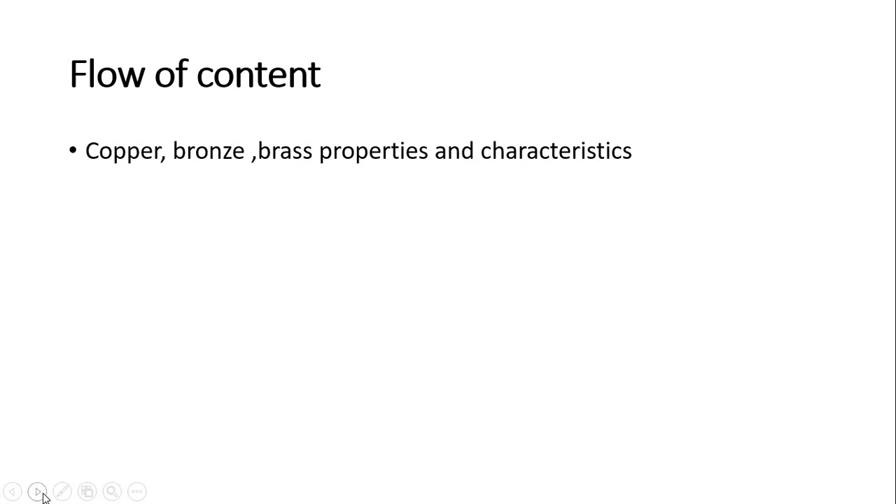In this video, we will discuss our chapter number 1 and the topic is characteristics of copper, bronze, brass. Now, introduction. Copper, brass and bronze are part of a category of metals known as red metals, which are characterized by their reddish tint. While copper is a pure metal, brass and bronze are copper alloys. Brass is a combination of copper and zinc, bronze is a combination of copper and tin.

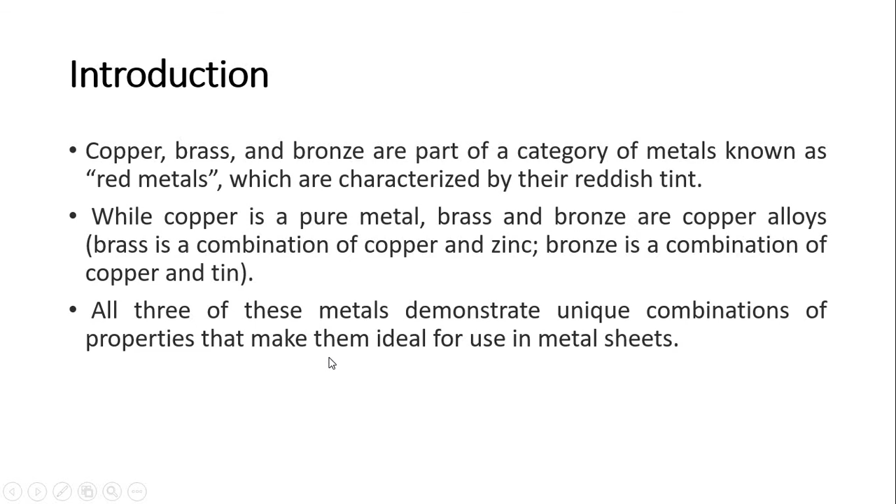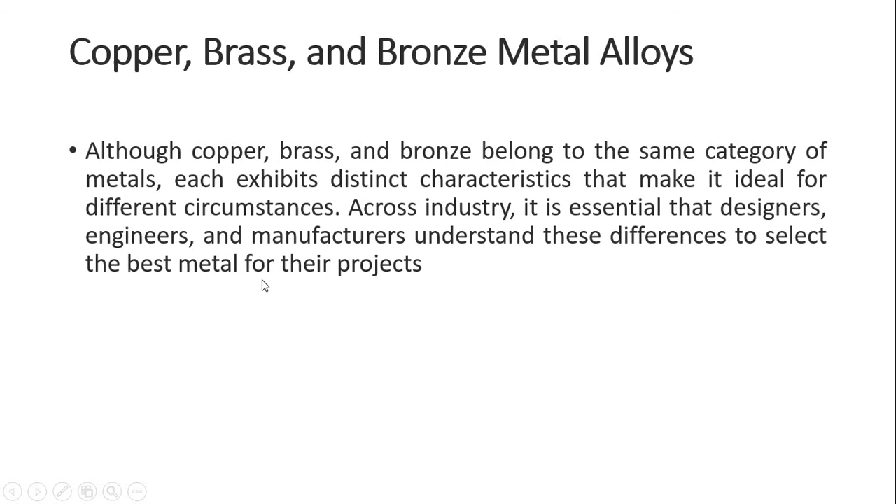All three of these metals demonstrate a unique combination of properties that make them ideal for use in metal sheets. Although copper, brass and bronze belong to the same category of metals, each exhibits distinct characteristics that make it ideal for different circumstances. Across the industry, it is essential that designers, engineers and manufacturers understand these differences to select the best metal for their projects. What is copper?

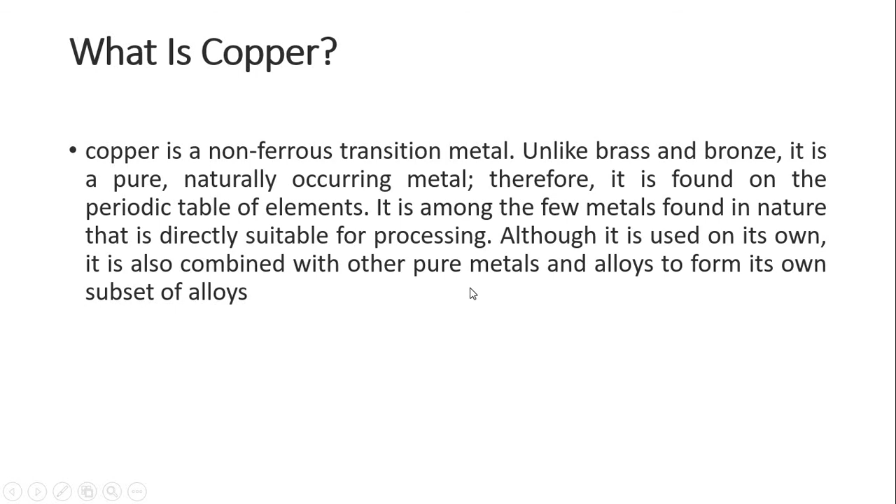Copper is a non-ferrous transition metal. Unlike brass and bronze, it is a pure, naturally occurring metal. Therefore, it is found on the periodic table of the elements. It is among the few metals found in nature that is directly suitable for processing. Although it is used on its own, it is also combined with other pure metals and alloys to form its own subset of alloys.

Properties of copper. Copper has several properties that make it ideal for construction and manufacturing. Copper demonstrates excellent thermal and electrical conductivity, making it suitable for use in electronic and electrical systems and thermal equipment. It exhibits resistance to many forms of damage, including impact, wear and corrosion. Additionally, it maintains its strength when flexed, formed and drawn.

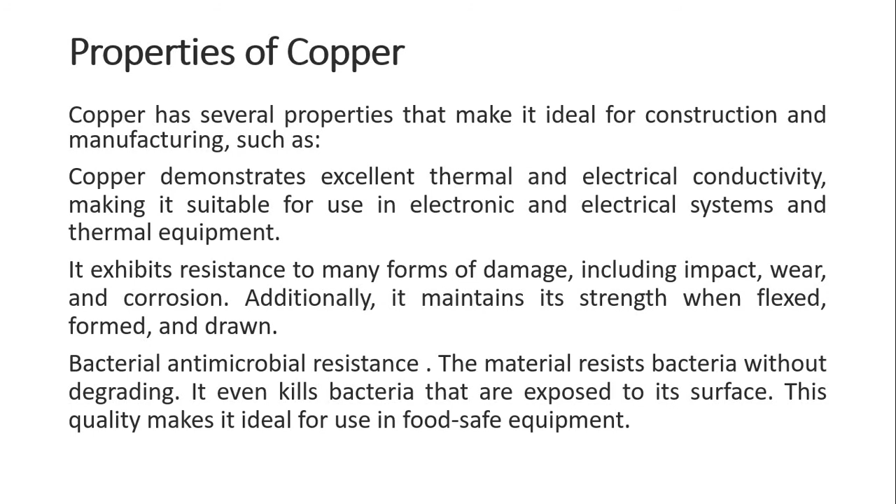Bacterial antimicrobial resistance. The material resists bacteria without degrading. It even kills bacteria that are exposed to its surface. This quality makes it ideal for use in food safe equipment. Now, available grades of copper. Copper is available in many different grades, and according to their grade and properties they are used in various applications. Alloy 101, alloy 110, alloy 122 and alloy 145 are available in rod and bar, and all these alloys have different properties.

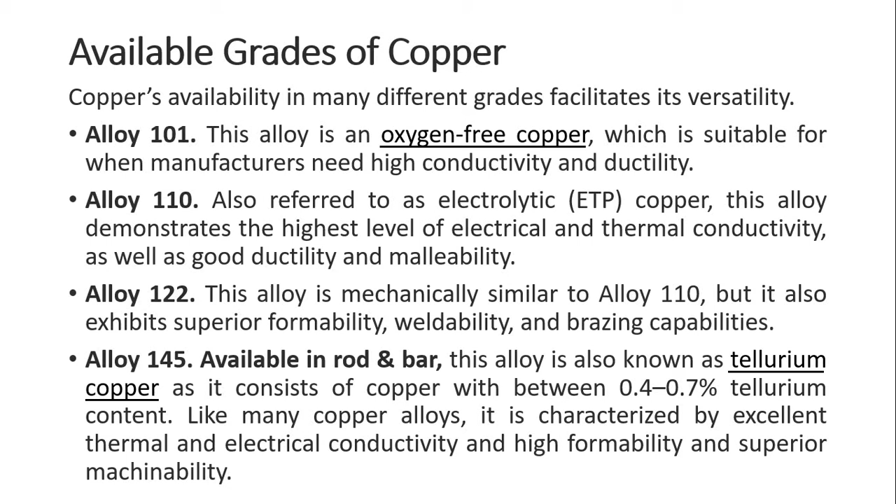Now, application of copper metal sheets and shapes. In general, copper offers excellent conductivity, formability and machinability. These qualities make copper metal sheets suitable for a wide range of industrial applications, including use as architectural construction, plumbing and heat exchanger materials and components. Additionally, its high ductility allows sheet to be drawn into wires for electrical systems.

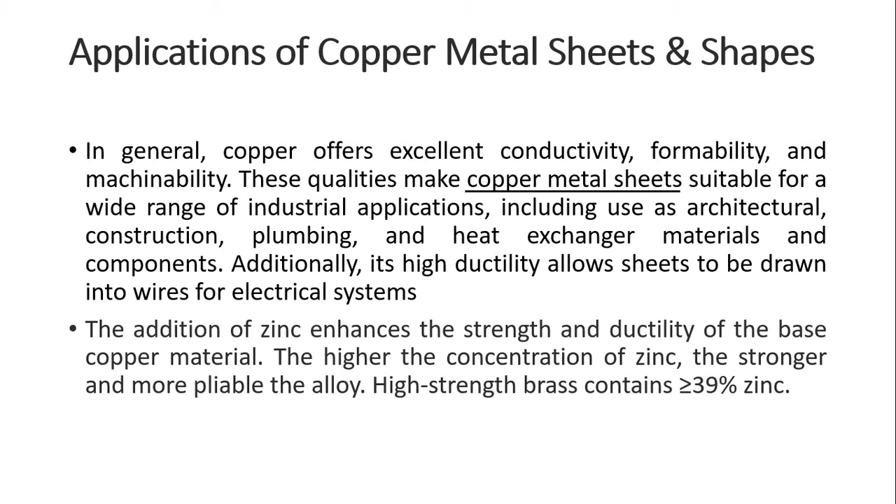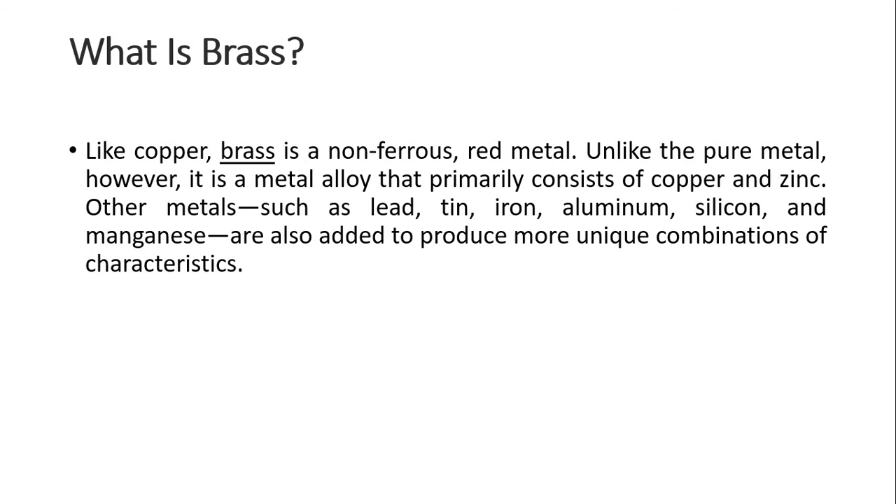The addition of zinc enhances the strength and ductility of the base copper material. The higher the concentration of zinc, the stronger and more pliable the alloy. High strength brass contains greater than or equal to 39% zinc. What is brass? Like copper, brass is a non-ferrous red metal. Unlike a pure metal, however, it is a metal alloy that primarily consists of copper and zinc. Other metals such as lead, tin, iron, aluminium, silicon and manganese are also added to produce more unique combinations of characteristics in brass.

Now, properties of brass. As a copper alloy, brass demonstrates many of the characteristic properties of copper. However, the alloy does exhibit a few distinct properties compared to pure copper and other copper alloys. For example, susceptibility to stress cracking, malleability and formability, low melting point, and non-ferromagnetism. Susceptibility to stress cracking: as brass is stronger and stiffer than pure copper, it is more susceptible to developing stress cracks. Malleability and formability: compared to bronze, brass is more malleable. Additionally, it is easy to cast or work.

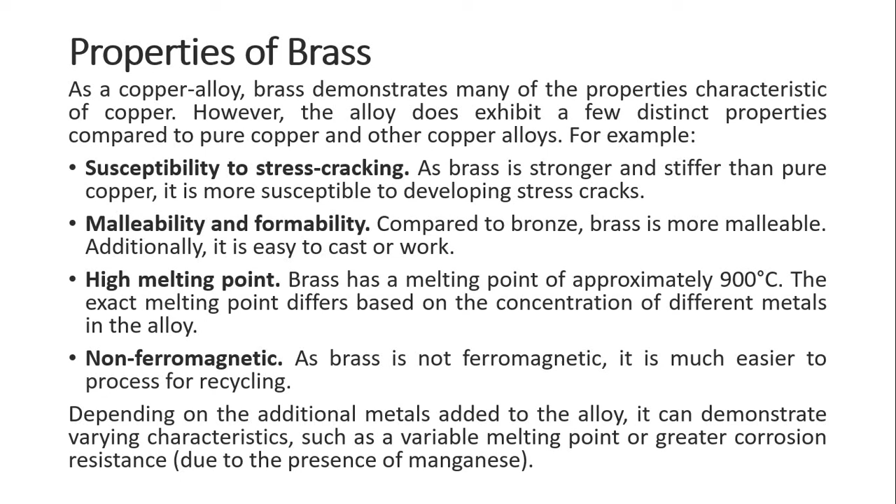High melting point. Brass has a melting point of approximately 900 degrees centigrade. The exact melting point differs based on the concentration of different metals in the alloy. Non-ferromagnetic. As brass is non-ferromagnetic, it is much easier to process for recycling. Depending on the additional metals added to the alloy, it can demonstrate varying characteristics such as a variable melting point or greater corrosion resistance due to the presence of manganese.

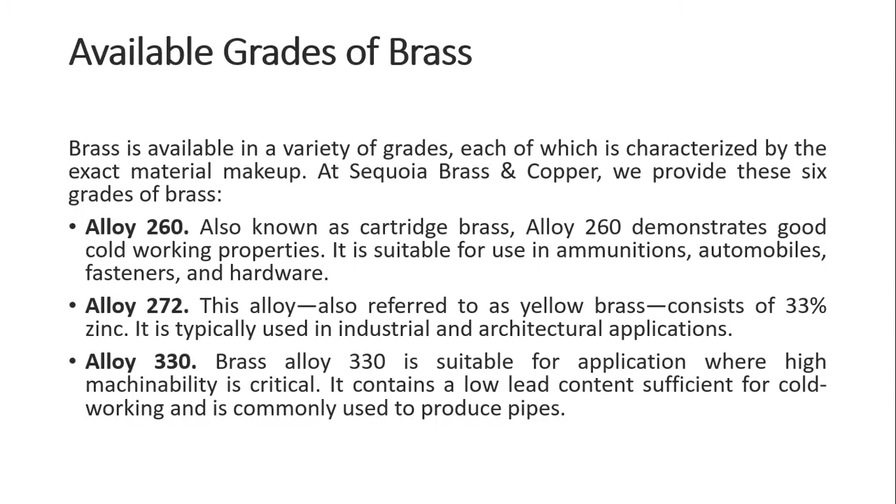Available grades of brass. Brass is available in a variety of grades, each of which is characterized by its exact material makeup, at Sequoia Brass and Copper. Alloy 260, alloy 272 and alloy 330 are available grades of brass, and these are the different alloys of brass. Application of brass alloy: brass metal has several different applications.

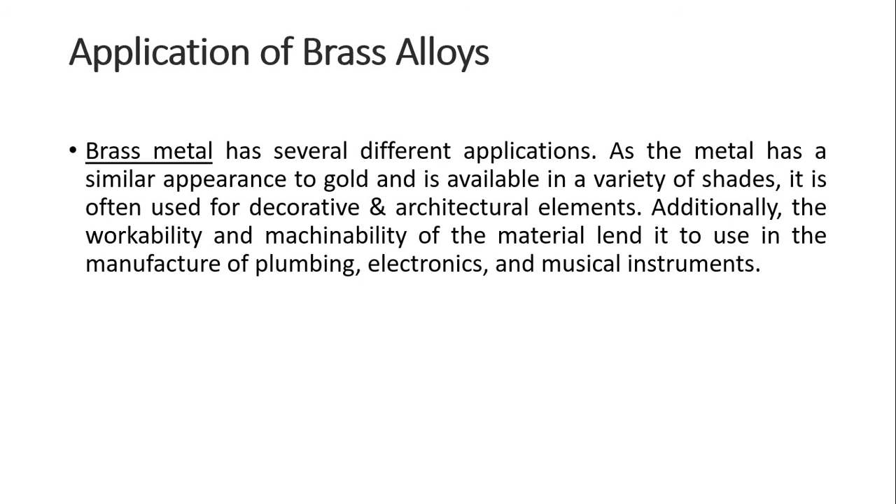As the metal has a similar appearance to gold and is available in a variety of shades, it is often used for decorative and architectural elements. Additionally, the workability and machinability of the material lend it to use in the manufacture of plumbing, electronics and musical instruments. Now, what is bronze?

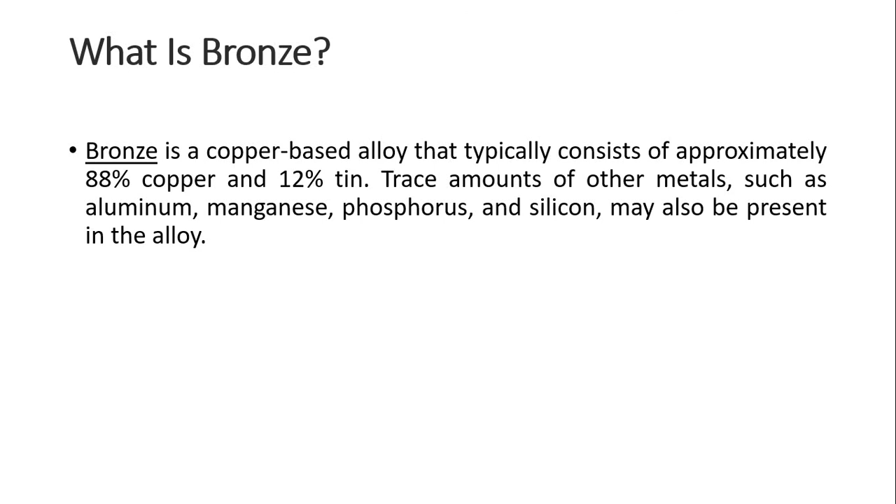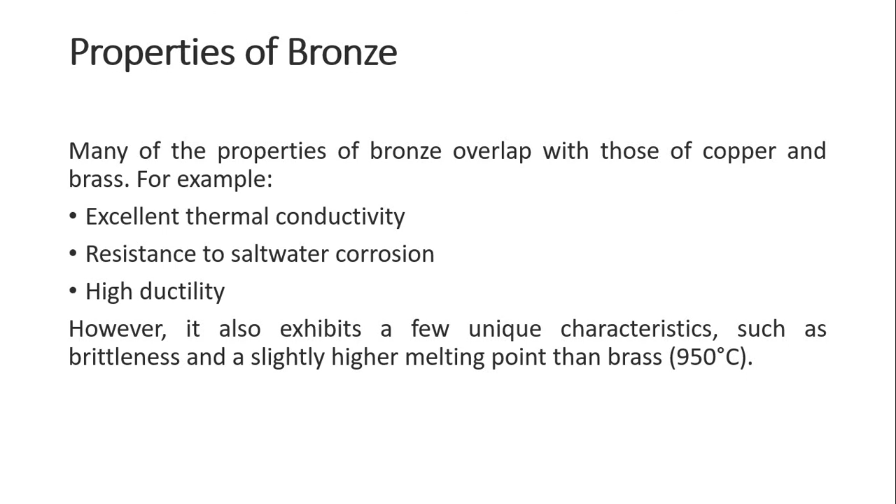Bronze is a copper-based alloy that typically consists of approximately 88% copper and 12% tin. Trace amounts of other metals such as aluminium, manganese, phosphorus and silicon may also be present in the alloy. Properties of bronze. Many of the properties of bronze overlap with those of copper and brass. For example, excellent thermal conductivity, resistance to salt water corrosion, high ductility. However, it also exhibits a few unique characteristics such as brittleness and a slightly higher melting point than brass, like 950 degrees.